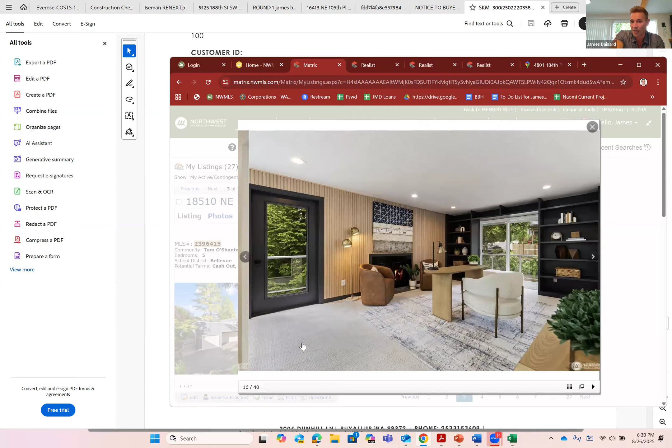The kitchen got totally replaced with new cabinets, new countertops, new appliances, all new light fixtures. But when you look at the work that this guy completed, and this is what we talked about when we walked through the house, we went through the property, and this is the quote that he gave us. And again, I've known this guy a long time.

Let's read the description: demolition, all baseboards stay. What does that mean? The real scope of work on this property was demo the cabinets in the kitchen, remove all doors and trim, gut every bathroom, remove all vanities, tubs, toilets, surrounds. We removed all carpet and flooring throughout the house except for the hardwoods. We removed all appliances. We removed all the trash and debris from the garage.

And again, this was a house that was lived in. A lot of things were already done, but we had to take everything apart. This is not what this quote says. So if the demolition line just says demolition, all baseboards stay, we don't know what that means. That could also mean he's going to take it down to studs. Not going to work for us, right? So we need to make better clarity.

And I'll show you kind of how we wrote out that scope of work. But as we can also see, one of the other major issues with this is there is no unit price or line item, and this is what we have to stay away from, guys. We don't want this lump sum bid at the bottom, 115,000. The reason we don't want that is because if we get in a dispute with that contractor, or the contractor says, well, hey, we didn't have enough budget in the electrical because of A, B, and C, we can't tell, so there's no way to negotiate it.

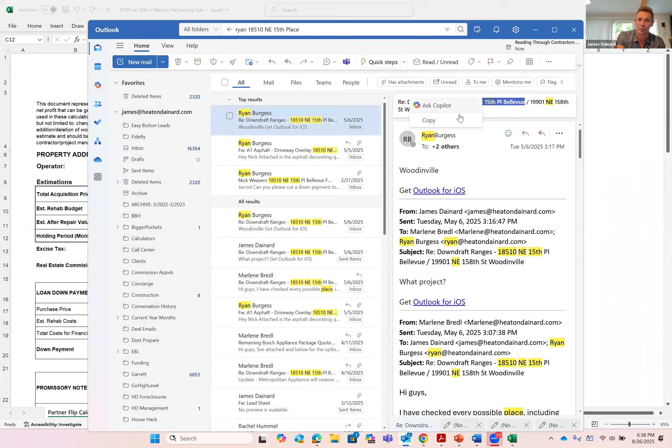Pull up the real quote.

Well, I'm just going to pull up a budget sheet because I want to go through how these quotes are supposed to read. So we're going to pull up an actual quote, but one thing I made for this call will get loaded into your toolkit.

I created a new scope of work worksheet for everybody. The more detail we are, the better. I know the construction calculator has training videos, and I love using that calculator, it works really well, but sometimes we just need something a little more basic. So I created a new little scope of worksheet for you guys. And depending on the location you're in, you want to make some modifications. For example, I don't think termite inspection is on there, but I know there's a lot of termites in Arizona and California, so you want to add area specifics.

Let me grab this. So the scope of work checklist, and then we're going to pull up an actual quote, is right here. I created this form, and it will be loaded into your toolkit. But as we see in the demo, throughout this checklist you can use it, cross things off, and give it to the contractor prior to quoting.

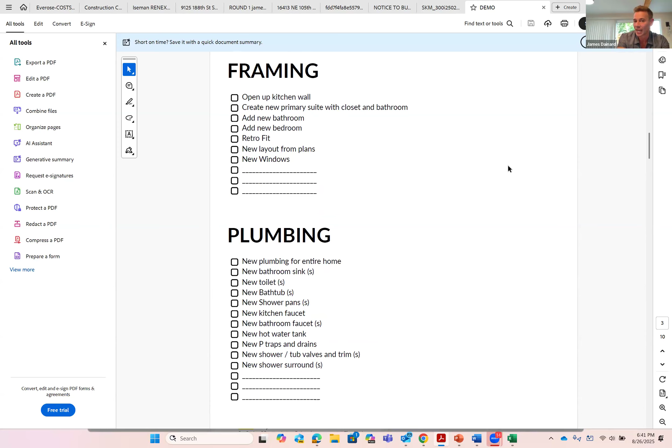Then this can go over into your budget sheet. Exterior, we want a new roof, new gutters, new fascia boards, new windows, new front door, new exterior doors, new garage doors. It's clearly laid out so you can go through the property and check the box as you're going through. You then take that form and use the construction calc to start really running your estimated costs.

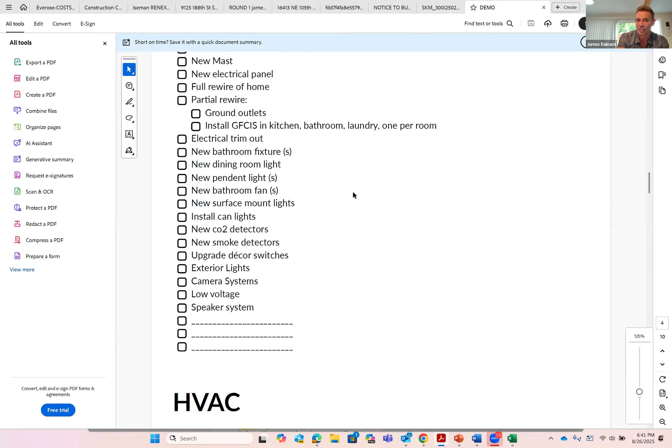It's a new sheet. I took the existing one that's already on there and revised it, making it more thorough and adding more things in for you guys. This will be loaded for you. So the first thing we want to do is, with our contractors, give them that scope of work and say all of these items need to be included inside of our quote.

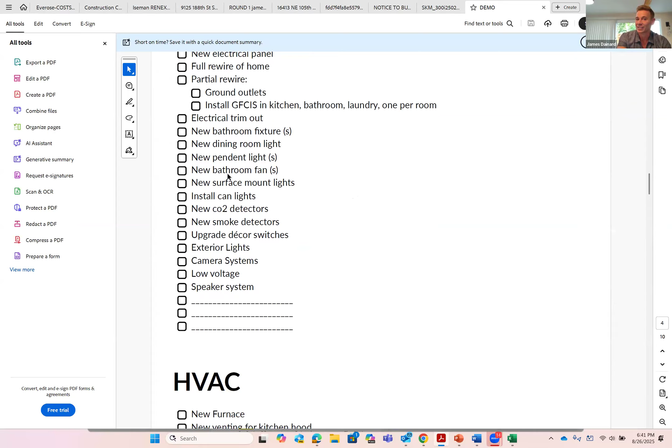You go through and check the boxes: this is what we want done, we want a new meter, a new mast, a new electrical panel, rewire the home. Do we want pendant lights? Are we putting in bathroom fans, surface mount lights? It allows you to go through the box by box and make sure it's in there with the quote.

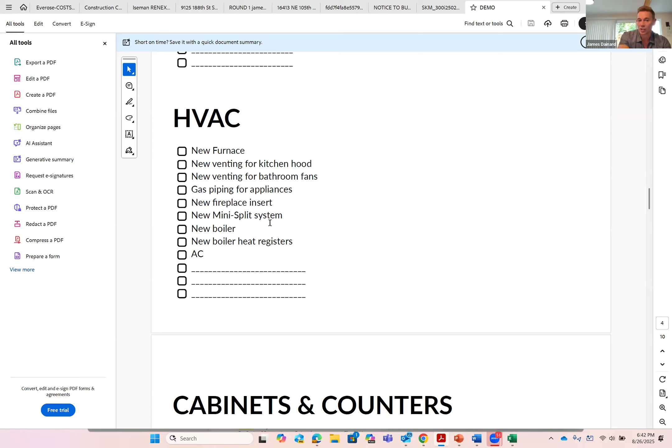Now, with this contractor we just put on this job, this is what we really want him to work off of. And if he's going to give me a very vague quote, at minimum I want all these boxes checked with details in there. But the issue is the scope of worksheet still won't give us the number breakdown.

So this is a new form I want you guys to go through. It's really helpful when you're going through a project to have everything in front of you, because it reminds you to check it, and it also reminds the contractor to put it inside the scope. Or if you have a vague quote, you can have the contractor sign this and put it inside the construction contract, acknowledging that all of these items are included. That clause in the construction contract ties it all together.

On the estimates, let's pull up a budget now.

What we need in our quotes, and this is why a lot of times, if the contractor can't break it down, because one issue we have as flippers is our people are not good at paperwork. Like the guy I told you sent me that estimate I showed you guys - that was a real estimate. He's worked with me a long time, he did all the work we talked about, but it was just not written out well. He's not good at writing up quotes and estimates. So a lot of times we like to prepare those things for him and they'll sign off on them.

I'd say 70% of our generals use my budget sheet as their quote, and we tie it together with the construction contract and the specs. But when we pull up this budget sheet, we need the same detail that the sheet has. And sometimes this can get a little overwhelming for the guys we use, so there's a couple ways we handle that.

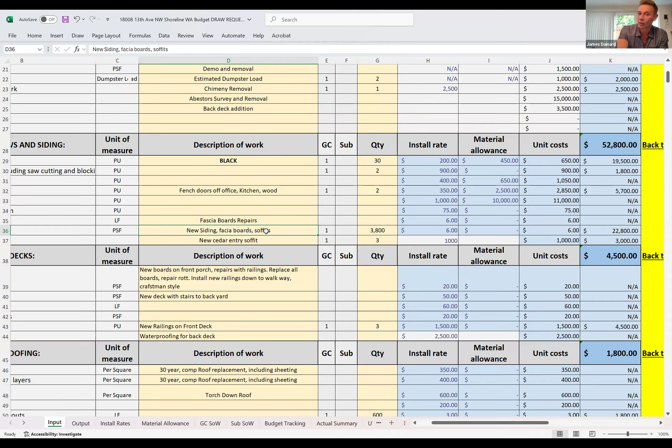Now the contractor knows exactly this is what we're replacing. It's 3,800 square feet, and we're paying him 22,800. We're putting in a new cedar soffit at the entryway - this is going to be $3,000 worth of woodwork on there. So we broke it out between the siding, which is all Hardie, and then the cedar specialty woodwork was separated off.

And again, these things are, the more detailed it is, the more we're going to prevent change orders. Just recently, I got a change order for a property, and Ryan, my project manager, goes, hey, look, we got a change order.

He sent it over, and a lot of the stuff we had discussed, but then as we're talking to the guy, he's like, yeah, we had to install some more beams. And I'm going, well, I'm looking at this quote, it says all beams are provided in this quote. And then it had a line item for $4,000 for the beams for this house.

So what it did is the contractor goes, oh, well, I didn't know about this beam and this beam, so it cost this much. And I'm going, okay, well what we had our project manager Ryan do, I go, hey, go back to him and ask which beams have you installed and what was the cost of those beams. And he's only installed one, but we gave him $4,000, even though he's treating it like a change order. His new beam install price was roughly $3,500.

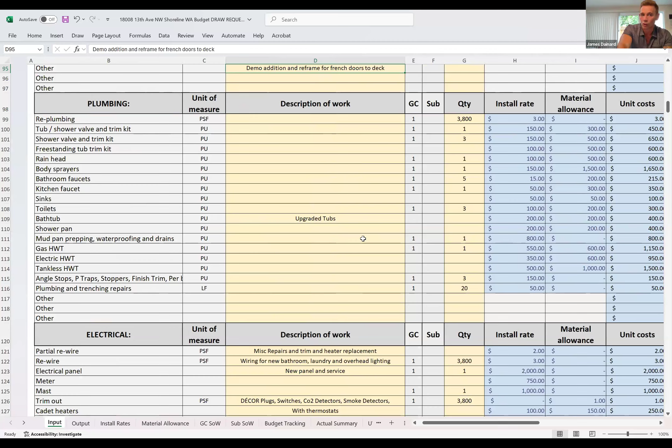So as we go through, these things are all broken out. His bid before said plumbing for the bathrooms, and there was no number attached. This is broken out this way, where we need the same detail. We're replumbing 3,800 square feet - that is the entire house. That's costing us 11,400.

He's installing one tub shower trim kit, three shower kits. He's installing those for $150 each, and the material allowance on those is $300 and $500. So now we have clarity in what he is installing it for, how many, and what the allowances are to purchase those items. He can't go to Home Depot and buy the $120 on-sale ones that's going to affect the price on my property. So these things have to be broken out with what they're being installed on.

If you don't have your bids broken out by install rate and material allowance, that is totally okay. That's how we do it because we want to be kind of a science on our quotes. But at worst case, you want to have them sign off on your spec sheet. So the spec sheets that we put together for you guys, or as you put them together, the contractor needs to at least sign off saying all spec pricing is included in pricing.

And again, that's that clarity, because you don't want to show up to your house and think you're getting quartz countertops and you get low grade granite countertops and it changes the look. So those are the things that we needed to always make sure are in our quotes. The quote they sent us - not going to work.

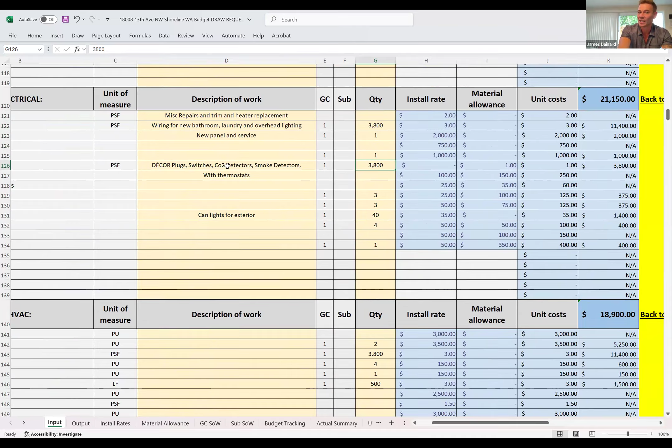He's trimming out all new switches throughout - decor plugs, not regular switches, CO2 detectors, smoke detectors. He's getting paid $1 a square foot to trim it out. Bathroom fixtures - we know he's putting in 3 of those. He installs those for 25 bucks. They're $100 each for the allowance. That's our number. We have to go find lights, or he has to go buy lights that are at least of $100 caliber, and we provide him with those specs.

If he buys a cheaper light, that tells us we get 50 bucks back. If we pick a more expensive light and it's $150, we have to give him $50 more. That's why there's no friction on the job site. So again, you don't have to have them broken down by install and allowance, but you have to have the spec sheet at least signed off on.

James, can I ask a question? Yeah, no, for sure, you guys. So Nicole and I definitely did this for our last project, and we did run into a couple of issues.

Like we had an accent wall listed there, and we had a fluted wood accent wall with the material cost and whatever. But then when it came down to actually installing the accent wall, we could not for the life of us find fluted wood materials that would result in the amount we had budgeted for.

We did not budget enough in this scope of work. They sent us a bid that included a total amount for the accent wall, but they really under-budgeted it, so we didn't get an accent wall at the end of the day. Even though it was in detail in the scope, they just didn't budget enough for it. There were no materials that were going to equal that total amount. So my question is, do we technically have to know all of our finishes when we're creating this sheet? Because if we had already picked out the fluted wood, we could have seen the price per square foot and built that into the sheet. But we didn't, so we got no accent wall.

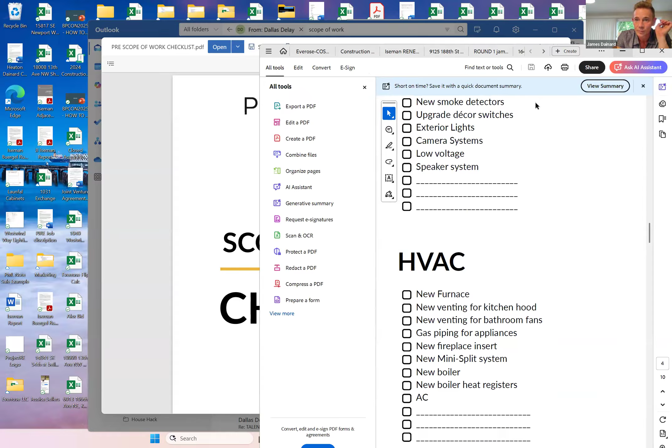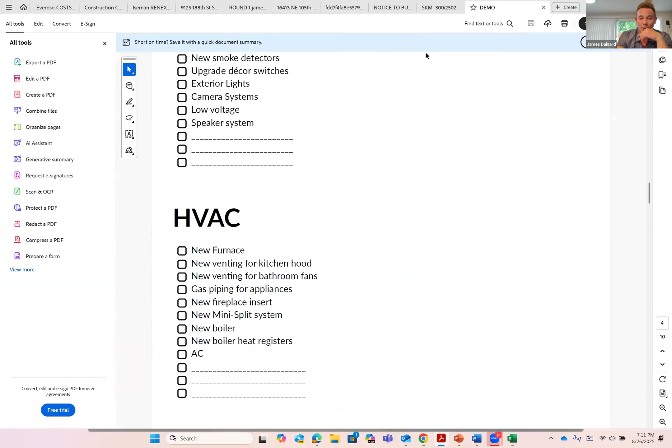Oh my gosh. Okay, here's our scope of work checklist. I don't know why you guys, this is not letting me move the box every time I open it. There we go.

So the two ways, I was trying to recap this because I wasn't showing this to you guys on the screen. We have this budget calc that we have the training video for. The best way to clear scope of work is to have a very detailed line item, which you can do by interviewing the contractors about their install rates, then getting the material rates for your allowances. You're able to select your spec level throughout any project and load in a budget, a basic, standard, or premium. So it gives you 4 different price points for the deals you're looking at.

We adjust our allowances based on the comps and what we're selling into the market. Like in our budget kitchens, we have a budget of $5,500 because we pick a lower grade spec. Our normal kitchens, we're $7,500, a little bit more basic, still thrifty, still affordable. And our luxury, we have a $20,000 allowance for the kitchen cabinets.

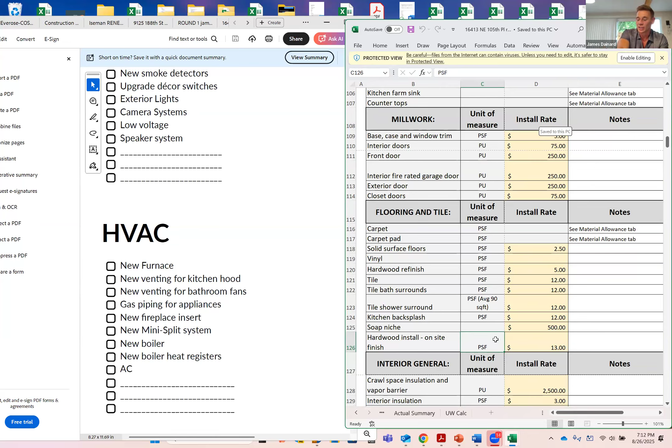We know the install rate on our kitchen is roughly $150 a box, so we can break that out. That's the most in-depth way to do it, as you interview those contractors, like what we talk about in Project Flip, getting that market rate information and putting it in. Now that does take time.

On the budget sheet, you have your underwriting tab, which will give you a rough basic number on this property. So historically I can go, okay, we renovate properties at roughly about $20 a square foot for our standard property. That's going to cover all our basic floors, millwork, cabinets, paint, tile, finishes, and trim out. It's going to give me a rough calculation.

It's also going to break out the other things like electrical, plumbing, for 2,050 square feet at $5 a foot on average, that's 10,250. Plumbing, 10,250. HVAC was about the same, 10,250, based on historicals. These numbers are too vague, though, because it doesn't say what's inside this HVAC quote.

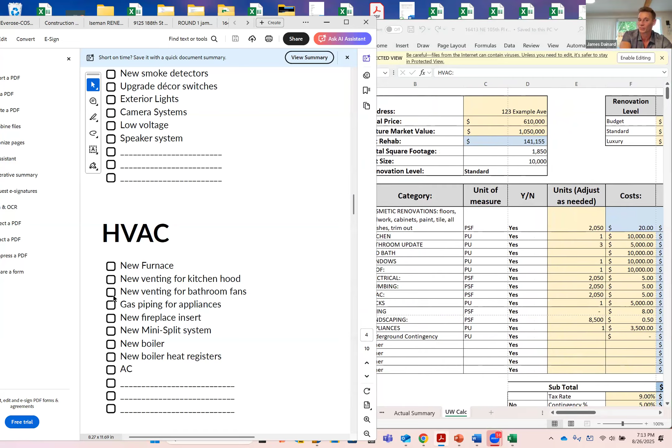The scope of work checklist, you could take your underwriting calc and attach it with, hey, I need a new furnace, new venting for my hood, new venting for my bathroom fans, and some gas piping to appliances. This will give you clarity inside that number. So now we know our HVAC is 10,250 and what is included. We then take our spec sheet and have them sign off on that as well.

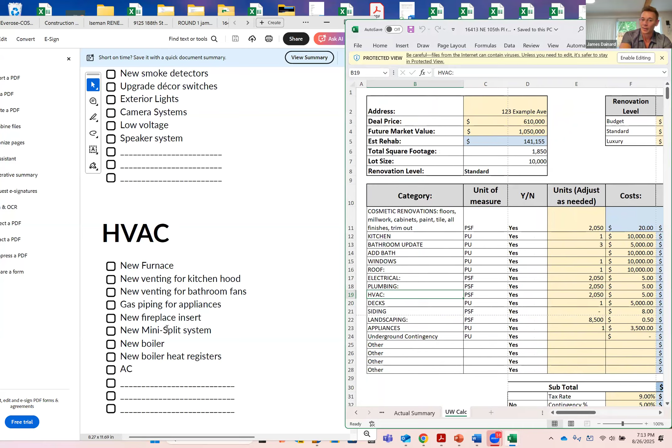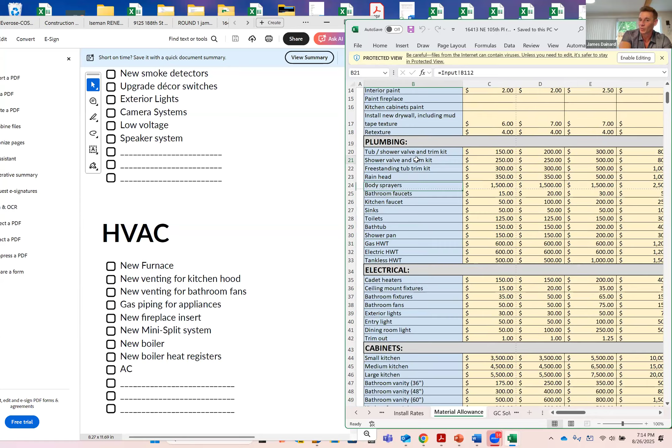And one thing you can do, if you don't have the specs already chosen, for us, if we're doing a standard renovation on this property, we can just pull these specs right out here for the contractor to sign off on. Hey contractor, in this bid you're giving me, the scope of work with the checklist, the underwriting calculator, and you're going to attach that with these allowances. And by the way, on the shower kit, you're going to be spending $500 per item on this. So you can break it all down. And if you have those things clarified, that's how you stop all the change orders.

So what I want to do now is open it up. Who's had problems with quotes? Who's had problems with budgets? What we really want to do is look at, okay, what were those problems, and were they a you problem, a clarity problem, or a contractor problem? So who's had issues and what do we want to cover on that?

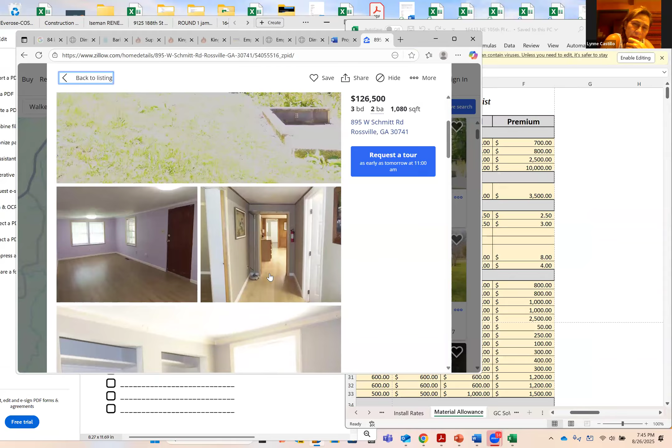Stick frame is something because it's kind of framed up, you can actually do something called a collar tie - this is kind of an affordable way to do it. Is a collar tie like the ceiling joist? I'll pull up a picture of what a collar tie is, because we want to see what's catching the loads on this house. Because sometimes, to be honest, you can look up there and go, oh, the beams are all there, we can almost just rip it out because there's no load. Now in this house, I don't think that's going to be the case.

Oh gosh, the load isn't bearing on the wall. It kind of depends on where you can vault, depending on how the framing is, whether it's done with 2x10s or 2x12s running up. If I have a vaulted ceiling with a drop ceiling and they're all running 2x12s over, there's a good shot, if it's not a big house with a big span, that I can bring that all the way up, because the joist of the ceiling is going to be holding a lot of the structure. I always verify that with an engineer.

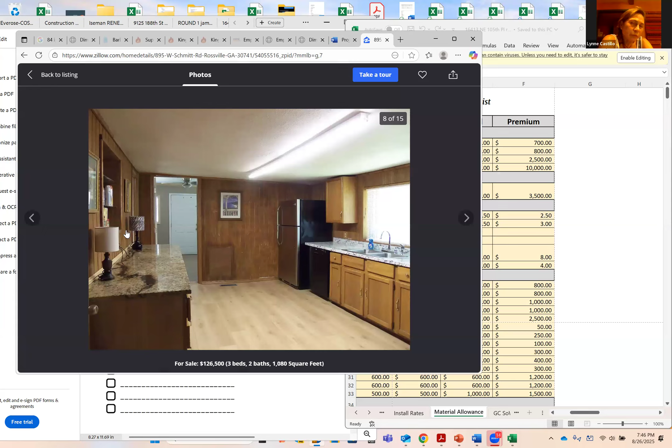What I'm trying to look at right here, there are a couple outbuildings there. Since it was built right after the war, I've done like 4 houses there, and the wood isn't like 2x8s and all this. You're lucky to get a 2x6, you know. You got like an old 2x4 almost.

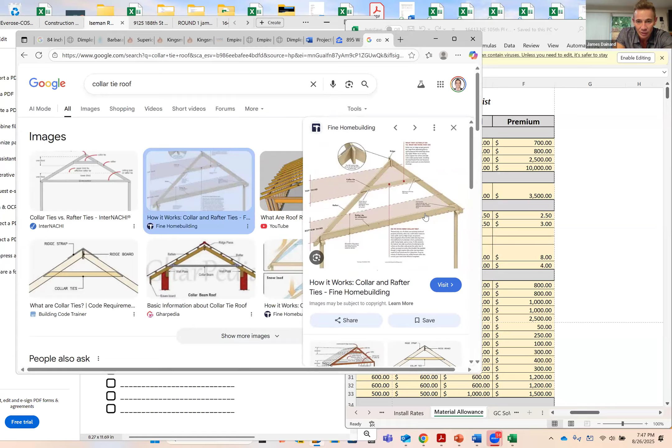Okay, so the cheapest way to do this, um, okay, holding this up right now. Can you still see my screen? Okay, so a collar tie is a way. Right now your ceiling is kind of at this bottom part right here in this picture.

A cheaper way—the more you take this out, like if you had to vault this because you have that kind of older bomb shelter framing, which trust me, I do a ton of houses just like that, I never really want to vault it, because those are like 2x4, 2x6s running through, and that's going to require a ton of lumber. Taking that out and rerunning 2x12s all the way up your whole ceiling is going to be very, very expensive. It doesn't make sense for this house. I'm just trying to see if there's some cheap way to get another 6 inches to make it sort of normal.

Running each one of those 2x12s can get expensive. But what you can do is something called a collar tie, where instead of vaulting the whole thing, it runs straight over. This costs a lot less because they're just running spans of 2x10s all the way through. Typically what I do in a low ceiling house is focus on the main areas to get them taller, and leave the bedrooms a little bit lower.

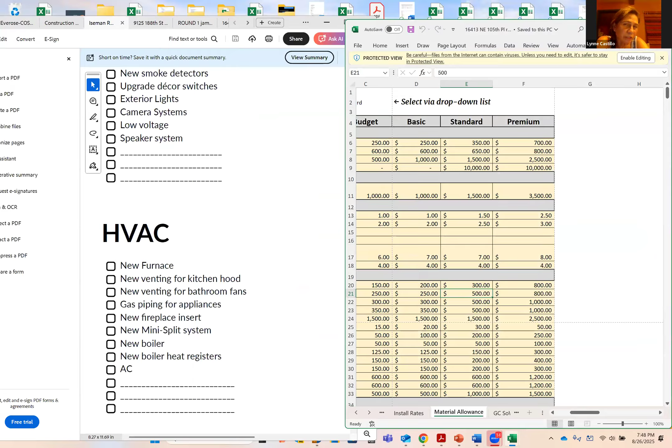Right, that was what they were suggesting. Do the living room and possibly the kitchen, and the rest is tolerable—it's a rental. I think the ceilings in two of the bedrooms are more normal also. Yeah, and since you're not buying this to resell, you're buying for a rental. I'm just looking for somewhere to park my money that's not 3%. Yeah, that bit works.

Have you looked at hard money yet? It pays you 10 to 12. Well, someone had suggested that, but I'm more of a doer, you know, in this market. There's good buys right now—there's not a house for 100 grand right now. Yeah, there's opportunities out here right now.

One thing I've done also—I had a house I sold in Kenmore, and we put a ton of money into this house. It was a pile of crap when I bought it. I did not realize how bad it was until I got inside. I was like, oh shit, this is bad. And the ceiling height was really low.

So I collar tied a section where you walked in, which kept it lower. The house was like an original 50s bomb shelter, and then they had an add-on over here that was really low, like what you're talking about. So a cheap way of fixing it is we actually installed three 4x4 skylights in the ceiling, and it actually opens up way more natural light and makes it feel way taller.

I'm gonna pull up a picture of that. Do you do that in that type of roof truss situation? Even though it's not trusses, you're saying, how do you do that? So they put the skylight in, they just frame it straight down, so you have this big opening, and it's all—gotcha.